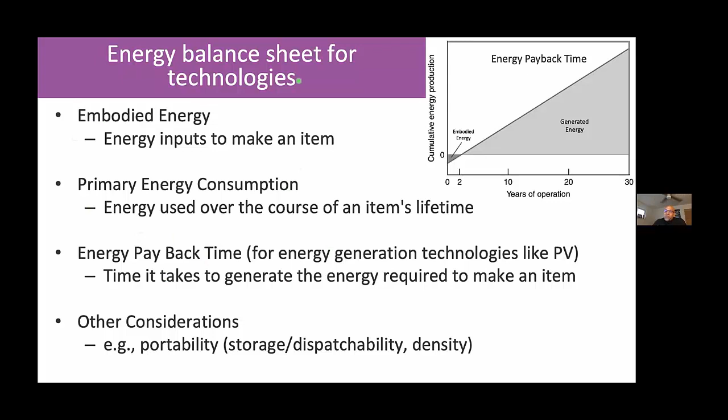That energy payback time is really kind of a critical break-even point. And then beyond that time frame, we have an energy return on investment from that particular technology. There are other considerations, like I mentioned in the context of a phone, portability, but for energy generation technologies, this idea of dispatchability, providing energy when we want it, where we want it, and also energy density. Things like fuels have high energy densities, and those have a value proposition all of their own that is part of the calculus that we want to do when we're thinking about energy technologies.

But if we look at solar technologies generally, there are a number of different solar technologies. These are the 3 primary ones that we typically think about at the National Renewable Energy Lab: solar fuels, concentrated solar power, and photovoltaics. Now, of these 3, 2 of them are really things that are deployed, and solar fuels is what we have here.

The idea of solar fuels is really an elegant one, which is the notion of taking direct sunlight and converting it into chemical energy in bonds, essentially. Either creating chemical bonds that we can use as a fuel, or driving directly the chemistry in a system like I've shown here, a fuel cell type configuration, and then getting the electricity from that.

So electrolysis is a great option for generating and releasing those kinds of chemical bonds. But we are trying to do, as you can see here with all the circles and all the little arrows, 5 or 6 really hard things simultaneously. In contrast with PV, we're trying to simplify that and make things a little bit more streamlined. But this does have the ability to generate things like fuels, which have some advantages in particular contexts with, say, dispatchability.

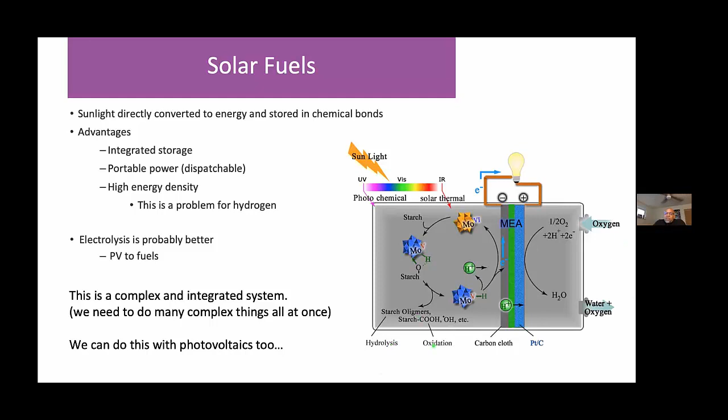If we look at, is it going to advance? Solar thermal, okay, concentrated solar power is something that we've known about for a while. It does have integrated storage. You have all these mirrors, you have what they call a heliostat or a receiver where you focus all the light, make something very, very hot, and then you use that thermal energy and convert it to electrical energy with a generator, essentially a steam turbine.

One of the advantages here is that you can do things like combined cycle, which improves efficiency, but you can also use dual fuel. So you can use a solar array during the day, and you could cross this over to, say, natural gas or some other fuel source to do the heating when you need it, or when the solar resource isn't as available. The catch has been that these installations really do require really good unobstructed sunlight. That is to say, things like clouds really impact the ability of these facilities to be very efficient.

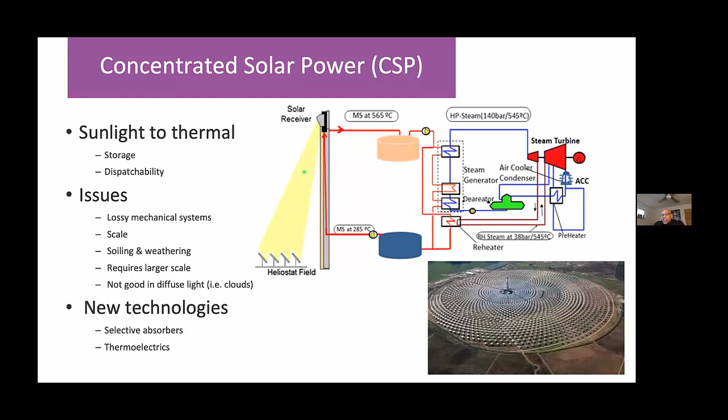There are also considerations of soiling, and the question of how large you need to be. Scale actually shows up here. You need to be big enough, but being too big creates its own set of issues for you as well. There are new technologies that people are looking at there, but the economics of these kinds of systems end up being pretty challenging for the most part.

Then we come to what we're going to focus on today, which are photovoltaic cells. So the idea here is a direct conversion of a photon from the sun into essentially an electron and hole. So it's kind of the inverse of what we do when we do an LED. In a light emitting diode, you combine an electron and a hole and you generate a photon. Here we're going to take a photon, create an electron and a hole, and those two things basically represent electricity that we can harvest directly.

I'm not going to make the mistake of, and I'm sure that most of the folks in the audience would certainly recognize the notion, right? People say, oh, well, the sun only shines during the day. Well, the sun is always shining. Whether or not you have access to it is maybe a separate matter. But if you're a ground mount PV or say a rooftop installation, certainly you only have access to the sun when the earth is essentially facing it. But that does create some challenges with dispatchability.

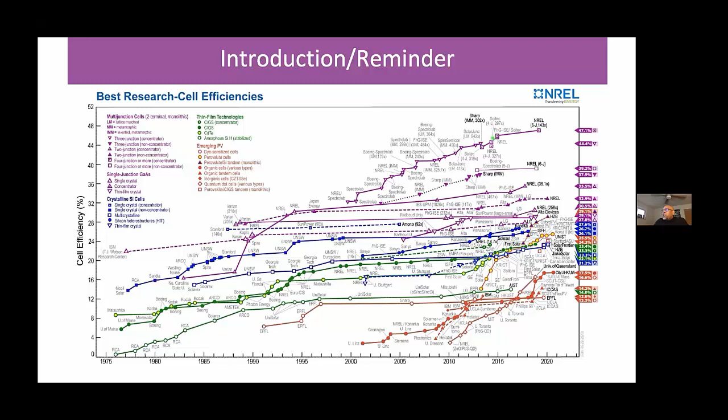But if you look at that, there are solar cells that started around shortly after 1975, and you can see that this chart goes up to, actually it looks like I've got a little bit of an older chart, but yeah, 2020. And there's a lot of different technologies, and some are way, way more efficient than others, as you can see. But you'll notice there's a little bit of a confluence around here, and we'll talk a little bit about why that is, and how it is you get into, say, this rarefied air up here of very, very high efficiency systems. But I wanted to make sure that we're all kind of on the same page with respect to the fundamental properties of a semiconductor.

If you take an atom by itself, it's got a discrete set of energy levels that are dictated by the details of that atom, right? Of its electrons, its nuclei, and so on. One easy example is something like neon, right? Neon gas has kind of discrete states, and it emits from the fact that basically you can excite an electron from the ground state to this upper state, and when it relaxes back down, it'll emit a photon, and that's how we generate light with, say, a neon light.

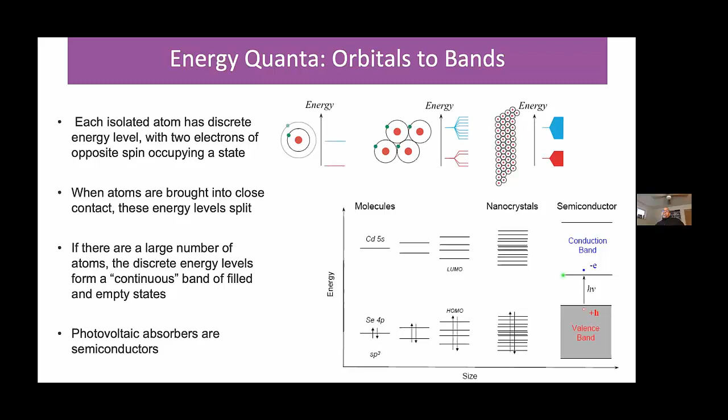All right, so this is the device physics of a solar cell. We have semiconductors where we can manipulate this electronic gap in the material in a way that we can tune it so that we can decide which photons we'll absorb. If a photon has an energy that's insufficient to basically take an electron out of the valence band to the conduction band, that means that the semiconductor is functionally transparent to those photon energies. And that's a really important kind of thing.

We very quickly thermalize the electron down, and that's again heat that's lost that we can't use as efficiently as we might if we just basically tuned the photon energy to the band energy here. All right. So that's Semiconductor 101. That's how all of these technologies here work.

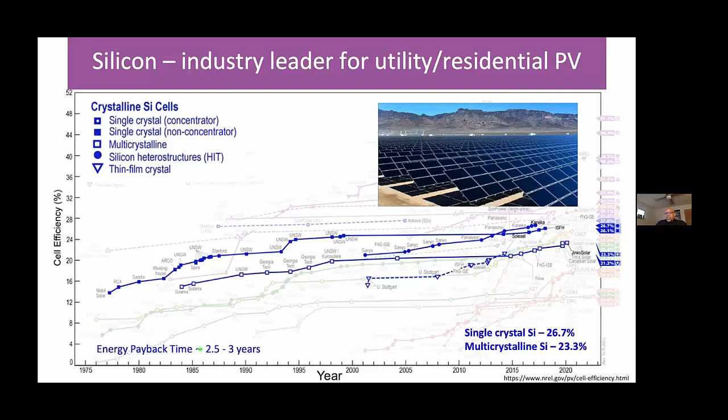Now, we have other materials like gallium arsenide, and these are really the best solar cell materials. They're much more efficient, right? From 26 to 30%, so 4 absolute percent more efficient than silicon. But if you look at the energy payback time, they're 4.5 to 5 years. And that's because the energy that it takes us to do all the refining of the materials and everything else is just a lot higher. And so it turns out, we'll talk a little bit more about this later, these materials are used, but they're used on things like the Mars rover.

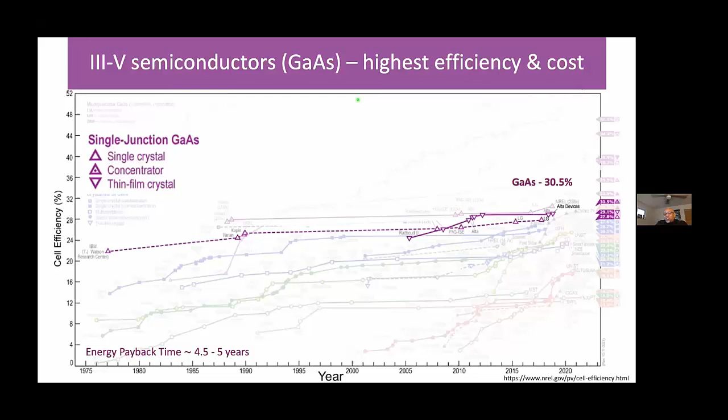The other commercial technology that we have at kind of gigawatt scale is CdTe, cadmium telluride. And First Solar, which is a US-based company, their headquarters, I believe, is in Toledo, or just outside Toledo, Ohio. This is a 22% technology, so not as efficient as, say, polycrystalline silicon or certainly single crystal silicon, but the energy payback time is a fraction of a year, right? So 0.8 to 0.9 years.

So it's much, much better from the perspective of the energy cost that it takes me to manufacture it relative to, say, a silicon module. And this is one of the reasons that while its efficiency is slightly lower, its cost is better. In addition, there are some other considerations as well, but this energy payback time is a real critical consideration.

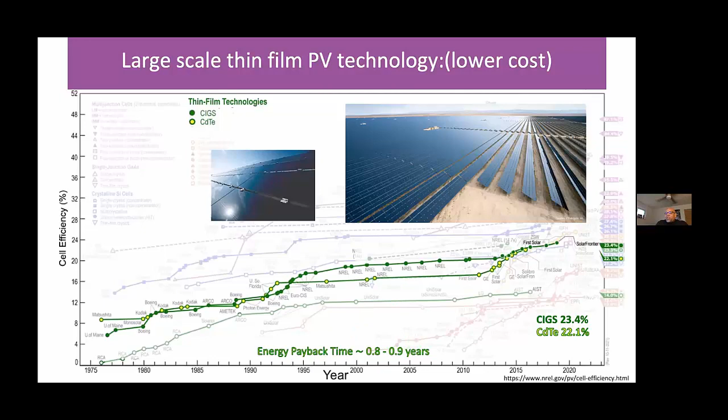So for the technologies that I work on most of my time, we're looking to basically change from that 0.8 to 0.9 years to 0.1 to 0.3 years for energy payback time with new technologies, namely these metal halide perovskites. And you can see here, I've included a number of other technologies that haven't succeeded because they really haven't achieved efficiencies that are sufficient to be commercially viable.

This is the efficiency chart for the record efficiencies for modules, which are what we put on people's roofs, i.e. combinations of cells that we construct one way or the other. Record silicon module at large scale, and the yellow or orange color here indicates the size of the module. A silicon champion module is at 22.8%, it's almost 23. CdTe, it's 19. And gallium arsenide is 25, so it's significantly higher, but again, at much, much greater cost.

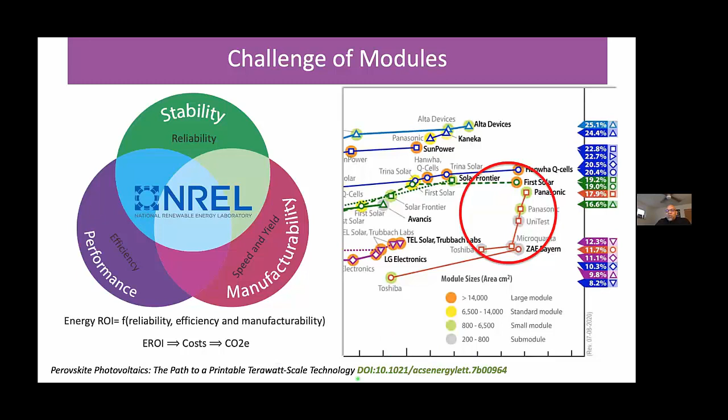And we have this article that's, I'm pretty sure it's open source, and you can find it where we walk through some of this stuff. But for some perspective, the first practical solar cells were reported in 1954. And this was going to be the thing that solved all of our problems, and with any luck still is. But the way that they evaluated the efficiency that I've shown you in these last couple graphs would not be okay to report today.

More importantly, when we think about efficiency, we test efficiency in what we call standard test conditions. We do it in a lab in a way that's very controlled under a very fixed set of conditions, but that's not how solar cells really operate in the real world. In the real world, they're outside and there's variable cloud cover, there's changes in temperature which impact the performance of the solar cell, and indeed the spectra can vary from different locations on the globe as well.

And when you account for all that variability, we have a figure of merit we call energy yield, which is taken from actual modules actually fielded to know what the yield of energy production is. It's got to be related to that efficiency, but it can vary pretty dramatically from just that raw efficiency number because of the details of the cell's ability to harvest energy, say, through the course of the day.

That efficiency is kind of the number that you get at peak sun, high noon in the middle of the day. But if, say, a technology like CdTe does better in the beginning of the day, at low light, in a way that silicon doesn't, and in fact, that's a thing, that can impact the energy yield. So when we talk about the energy payback time, we really are comparing that efficiency number or that idealized kind of energy yield to what it is that we've spent in terms of making that device.

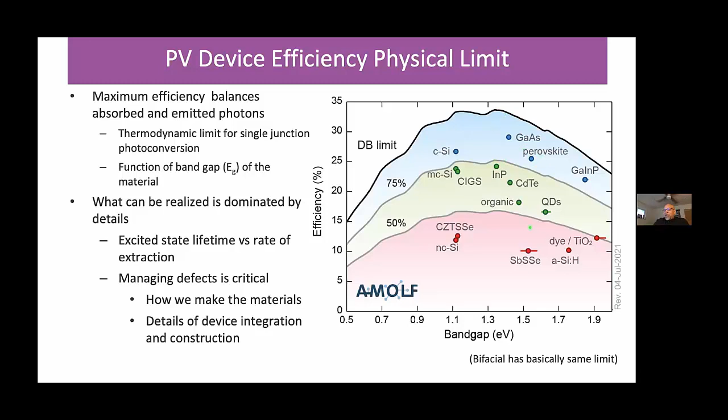So how do we beat this limit? Well, if you think about where our fundamental losses are coming from, they're coming from this compromise of, do we take the photon in or do we let it go through? And if we take the photon by lowering the band gap, how much do we create in terms of thermalization loss? If I had a single color for the light from the sun, I could make an 85% solar cell pretty easily if I matched it to the color that the sun was emitting if it was just one wavelength. So it really is the spectral content that creates this limitation.

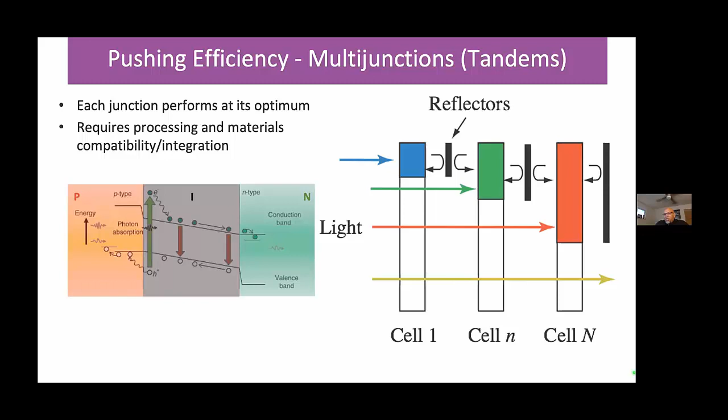So if I can slice the solar spectrum up into chunks by using multiple cells that each take a different slice, right? I can take these high energy blue photons, which would have created a lot of thermalization loss in this lower gap cell. I can take those off the top. They don't create that thermalization loss. The ones that aren't energetic enough go through to that second cell and to the third cell and to the fourth cell. And it's this strategy that allows us to get up into these extreme areas of the efficiency chart.

But as the graphics here indicate, these really are the best solar, and this kind of shows you a triple junction device like what I showed before, and how the solar spectrum is actually sliced apart by the different subcells. So this is the kind of thing that's often implemented. And again, it's one of the best technologies on the planet. Turns out, per square meter, it's kind of the cost of a Maserati. But if you're going to have a rover on Mars, it's totally a viable technology.

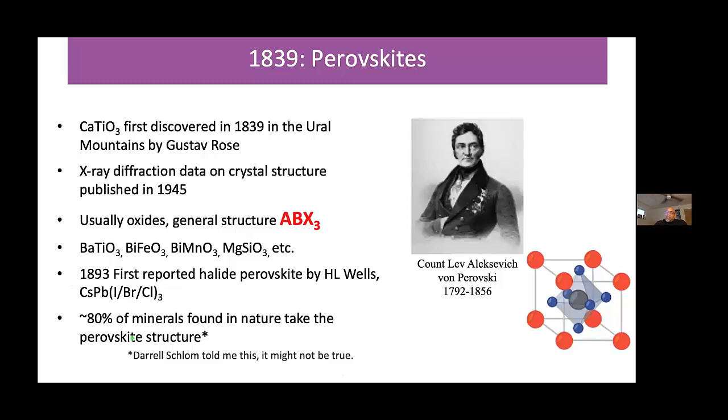So now I want to switch gears slightly to talk a little bit about perovskites. Perovskites are a really, really common structural motif for minerals that are common in the Earth's crust. Different oxides, barium titanate, bismuth iron oxide, all these kind of things. And something on the order of 80% of the minerals found naturally are perovskites. So those are not relevant for solar. But they have the same structural form that I've shown down here of the materials that are.

The materials that are relevant for solar are what we call the metal halide perovskites. And again, they have the same kind of crystallographic structure, the way the atoms are assembled, and the same chemical formula. But one of the things that's unique about these is that these materials are synthetic in the sense that they don't exist in nature. And one of the things that distinguishes them is that they have the metal, and here I've shown lead, but there are a couple choices we can make for the metal center. But they have these gray things that can actually be molecules rather than atoms, although we can use things like cesium at these gray sites as well. But they are a combination of organic and inorganic for the most part.

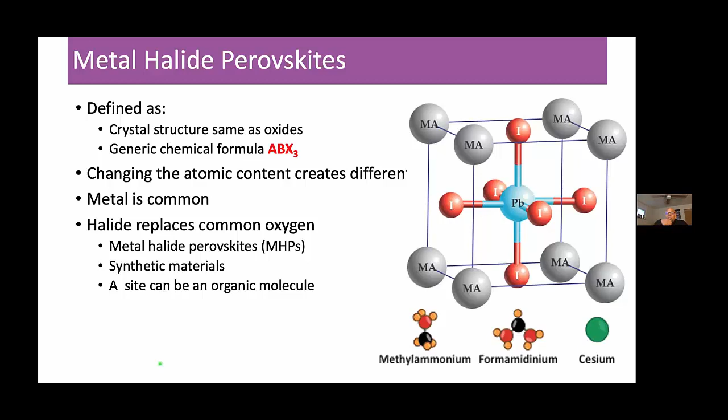Now, these materials have been around for a while, and they were first found by David Mitzi, and he was interested in them for transistors. But then more recently, a little over a decade ago now, people realized they were really, really interesting for the solar task. That is to say, they were semiconductors, because we knew about them from David Mitzi for things like transistors, but they weren't sufficiently better than the incumbent technologies, namely amorphous silicon in that case, for transistor applications. But for solar applications, they're way, way better than a lot of the other materials that we've looked at.

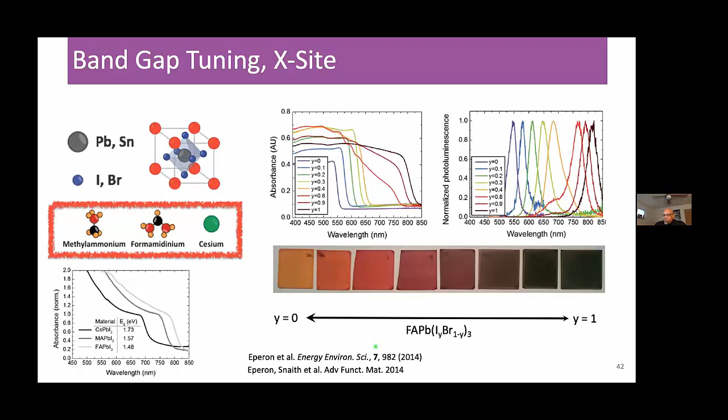So they absorb light really, really well. We can also tune their optical absorption, or that electronic gap that we talked about earlier. And these graphs just show that. You can see films where, as we change out the red dot here with different options out of this red box, we can tune essentially the color of these materials, and that again corresponds to the optical band gap. So they have a large degree of tunability, they interact well with light, and they do a lot of the other very basic things at a semiconductor level that we need to do to absorb photons, create electrons and holes, and extract them out effectively.

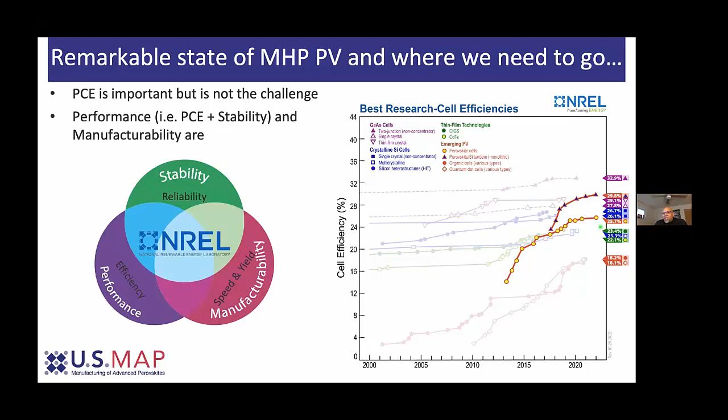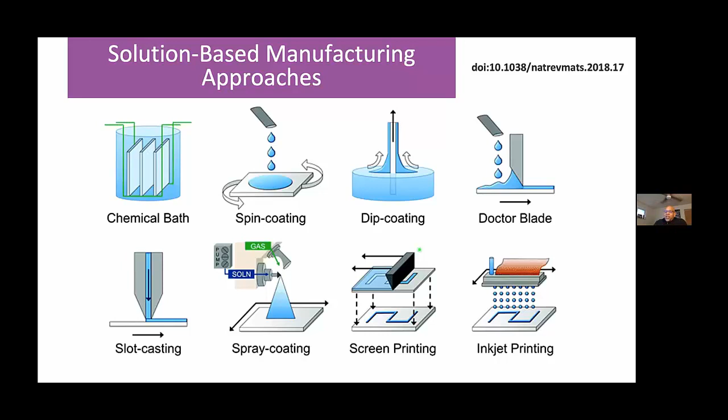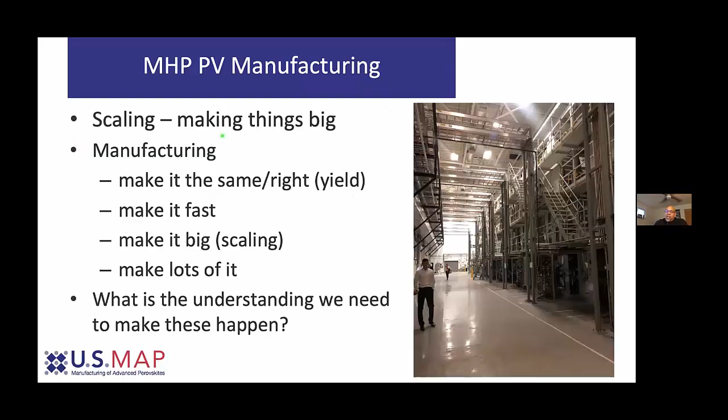And when you think about what that means, because we have essentially a material that has low embodied energy, we can tune the details of the band structure. We can make all these different tandems in a way that is kind of potential. Well, we think it's transformational.

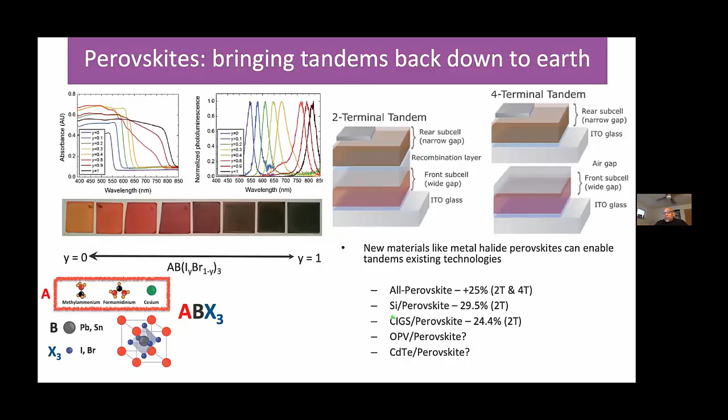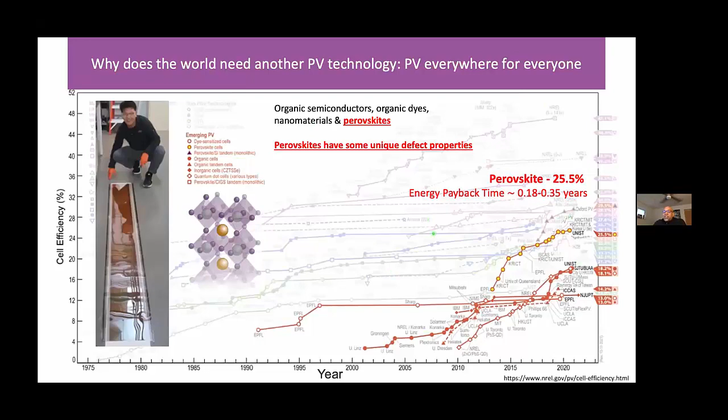CdTe with perovskite is one that people are kind of looking at, but maybe doesn't make as much sense as some of these. But we can really make all of these things happen, which means we now have access to higher efficiencies than we ever had before. And all with this notion of low embodied energy and really rapid energy payback time, and the idea that we're going to be targeting these kind of places in the chart at the module level.

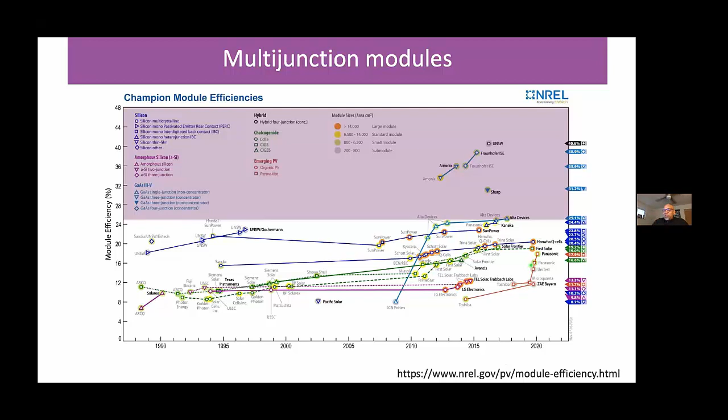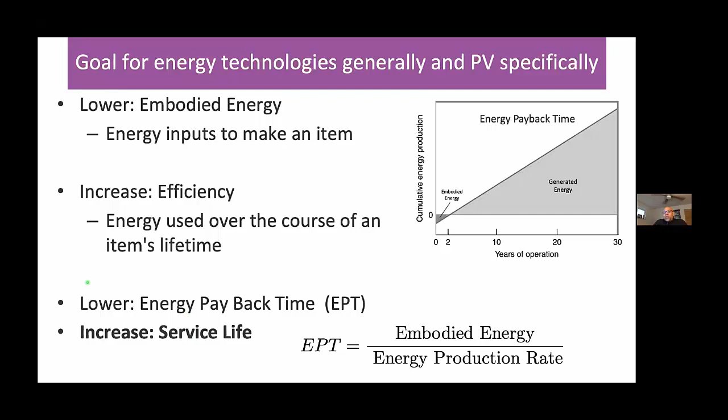So the last thing I want to talk about, given the hockey stick that I showed you in terms of this climb here: the scalability seems to be there with the materials at a very basic level. So that leaves me with this question of the years of operation, or the reliability, because this is an important thing in the context of this energy payback time and the EROI.

The challenge is that I can fundamentally walk into the lab tomorrow and tell you the efficiency in 5 minutes. Telling you whether or not that particular device is going to be scalable, okay, maybe that takes a couple weeks or maybe a month. But to ask the question, for a device I make today, where will it be in 30 years, is a much harder question.

And in the context of reliability, one of my colleagues used to say, if you heat an egg a little bit in the incubator, you get one thing, but if you heat it in boiling water, you get a very different thing. And so the notion of doing stress tests or accelerated testing on PV technologies sounds really good, but it's a really massive challenge.

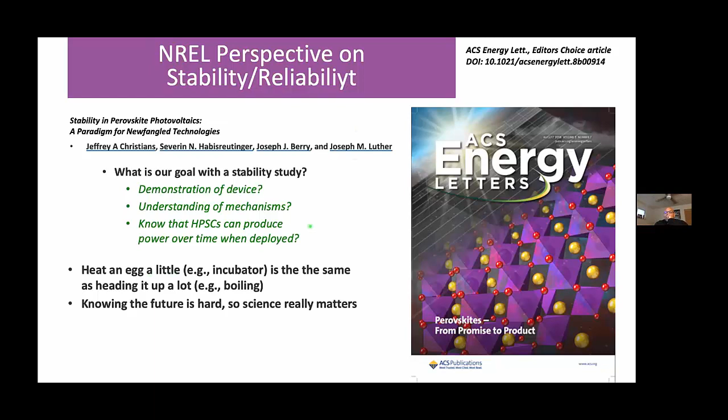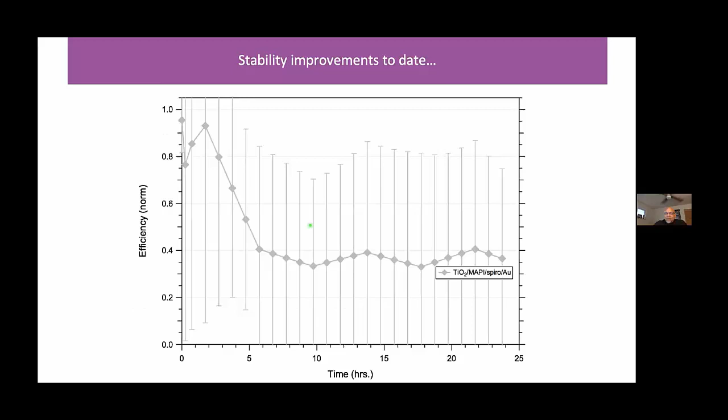And that's a lot of what we're doing these days: to understand how some of the manufacturing that I talked about couples to what the reliability really is, and how we find out very quickly what the reliability is. So the very last thing I'll leave you with is the stability of a solar cell that we made in the very first year of the project. My project's now been going about 6.5, 7 years. But this is all work that was done within the first year.

So we made a device that was a little bit more stable. I mean, this was a pretty hot mess. Then we made some more modifications, and we improved the stability a little bit more, and yet a little bit more, and yet more. And if you look at the difference between here and here, that represents about a factor of 100 change in the stability. And we did that in about 2.5 years.

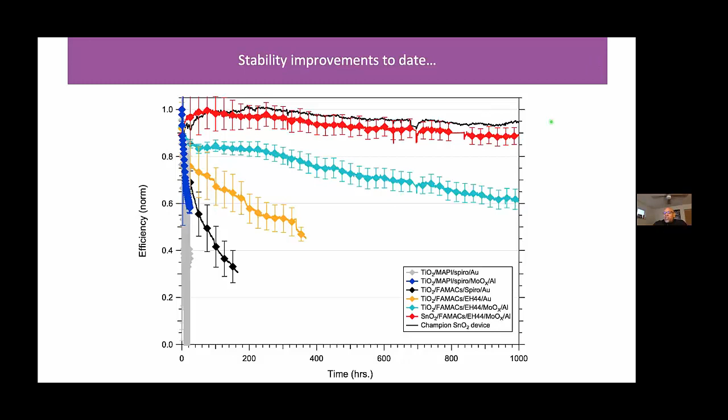And I thought we would still be working on this stuff, but these days we're very much concerned not with what's happening indoors, but what's happening outdoors with these devices. With what we see in the lab, I have to wait entirely too long to know whether or not I have any kind of defects that are going to cause a problem for long-term stability. And so we're doing more and more outdoor testing.

And then, perovskites are a technology that a lot of people say aren't ready for prime time, but there are already demonstrations out in the world of stable perovskite solar cells over extended periods of time in outdoor operation, at efficiencies that are less than what our team would aspire to, but are reasonably efficient nonetheless.

And then finally, turning back to where we are with PV technologies more generally, PV really is at a tipping point where we're in a position to start generating electricity with these clean technologies at a scale and size that really moves from a consumption to a sustainable model.

And that means that we need to be thinking about things like end of life and other things for PV technologies like silicon, but also for emerging technologies in addition to those incumbents, like perovskites. And indeed, we've already done a lot of work for things like end of life for perovskite solar cells, and are increasingly doing more and more on some of the incumbent technologies as well, as they have a little bit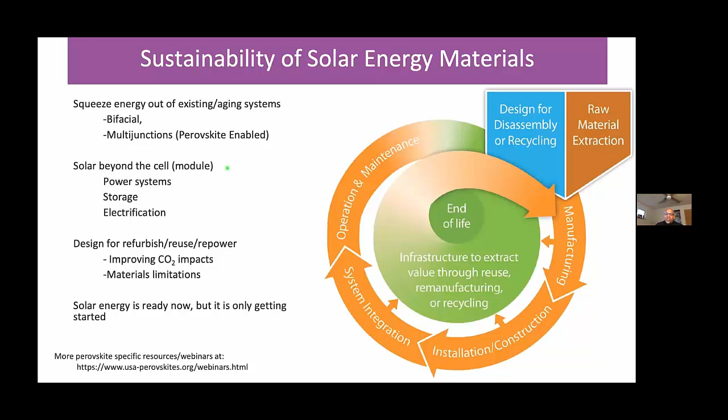more challenge. We've been designing from the get-go for the notion of achieving, say, terawatt scale technologies, which means we have to think about these things at the beginning in a way that silicon hasn't had to do, but is clearly what they aspire to do. So they're catching up very, very rapidly, since there's a lot of really high quality work in that technology as well. So I think that's all I got.

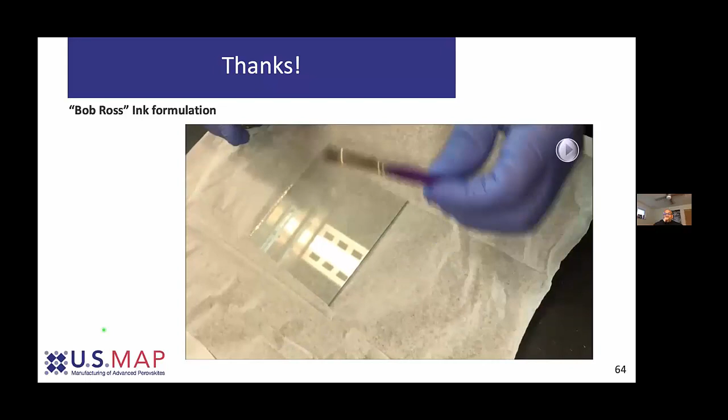I do have a little video that we'll let run. But this shows the magic of perovskites. Methylammonium iodide and PbI2 in my magic solvent chemistry I've been working on. Now we're going to see if we can emulate Bob Ross.

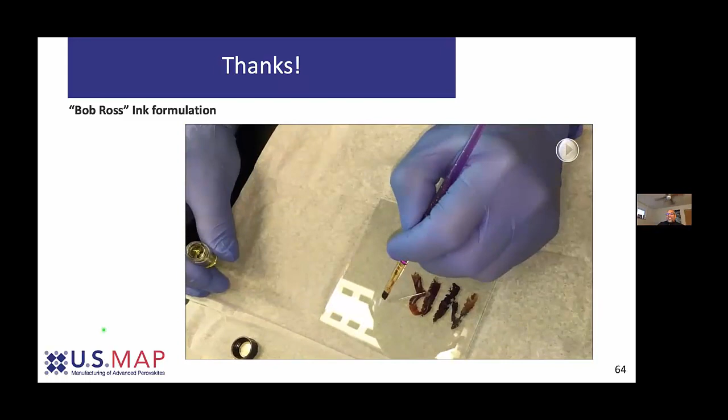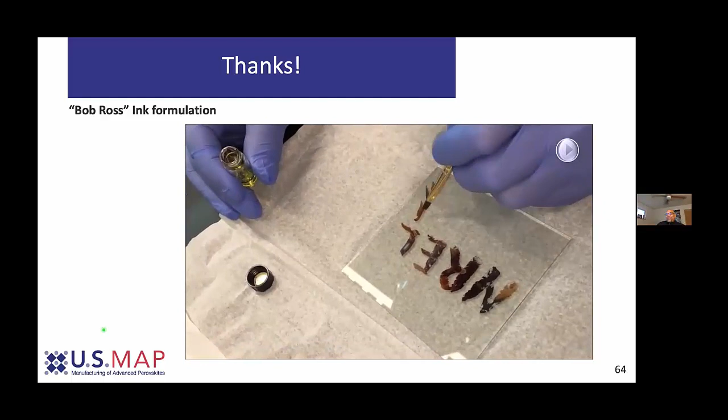So I'll just take a little tree. Say that I work at NREL. And then for Bob Ross, we'll put a couple happy trees in here. Maybe a little sun. A little mountain shrub. Let's see, a little mountain. Sun. So I think that makes the point.

And that's a few years old now. You can find it on YouTube, but that ink will support kind of an 18% efficient device. It's one of the older ones. We've moved on from that, it turns out, but it still demonstrates kind of the promise. So I'll take any questions if that makes sense.

Thank you so much, Joe. Chuck, are you and Joe ready? I can try and find the... I don't see the chat, but yeah. Just give me a minute. Okay. Sure, I can take the first one.

Go ahead, Joe. What, in your opinion, is the likelihood of adoption of the Build Back Better energy provisions in standalone legislation? That's outside my lane, I'm afraid. Yeah, I think we'll have to table that one. We could handle that at the end if somebody. I would love to know the answer to that myself, if I'm honest. I mean, I'm a serial optimist. Well, in some things I'm optimistic, in other things, right? As a scientist, you're paid to be pessimistic. My dad was a political science professor before he retired, so he's the person to ask on that one, I'm afraid.

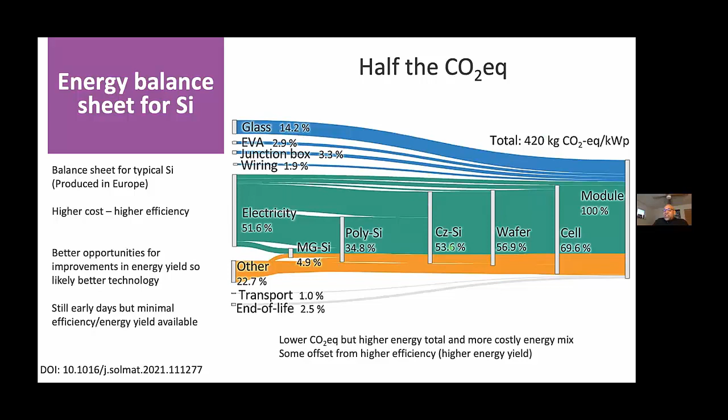So in other words, the price that you're going to have to pay for this module is significantly greater than the price you're going to pay for this one, because there's essentially no carbon tax, for example, as one way to normalize that. And that makes it very difficult to compete in the context of a U.S. market, because there are solar manufacturers in the U.S. like Hemlock and others, but if you're manufacturing silicon, there are a lot of other customers in the U.S.

For silicon, like Intel and AMD and Texas Instruments, those are the people you're going to sell your silicon to. You aren't going to sell it to people who are trying to make commodity products like solar. So that's a big challenge, right?

And there are a lot of reasons that are beyond the nuts and bolts of the science of what has to happen to make the materials, where from an economic perspective, there are some structural advantages that the central government of China has set up that give them an advantage in manufacturing and producing silicon that can be taken by people and made into modules at costs that are lower than what you could argue would reflect fair market value.

I believe that's something that's been investigated by Commerce and others. But that's probably about as much as I can say while staying in my lane. I hope that answers the question.

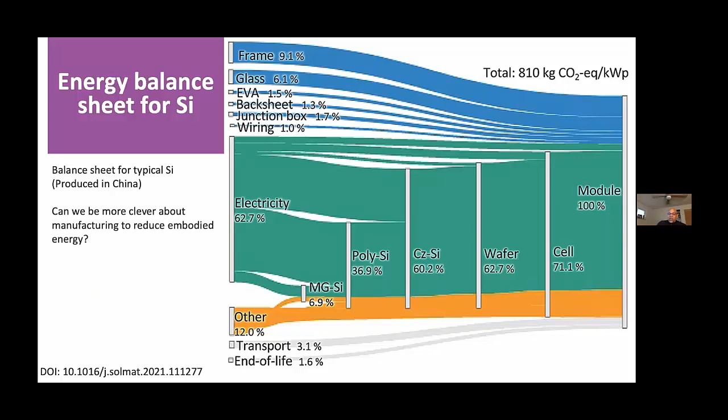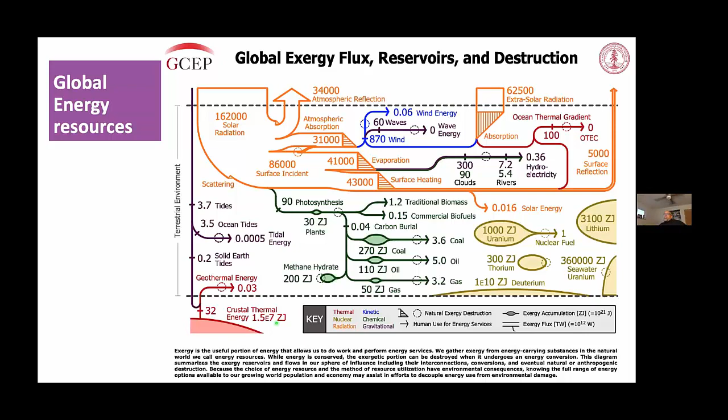Thank you. So you want to get the next one, Joe? Sure. For the outdoor testing, are you using full-sized modules using perovskites? So at the moment, we are still using what we would consider to be intermediate sized demonstrators. So we're doing things that are starting to become the size of a piece of paper, so to speak.

And that allows us to test a lot of the things that we're interested in, but it's clearly a necessary but insufficient exercise. And we're funded by the U.S. Department of Commerce, or pardon me, U.S. Department of Energy. Department of Commerce, where did that come from?

U.S. Department of Energy, the Solar Energy Technologies Office just did a piece in ACS Energy Letters where they outline their portfolio. And that office really does a lot of work to tailor their portfolio so that they're touching all the bases. But some of these activities are much more capital and resource intensive. And we're trying to get to the place where those kinds of investments can be made that really help U.S. industry in a way that's meaningful.

But we're doing intermediate size, not full-on modules like you would see from the likes of First Solar. And indeed, that's reflected directly in some of the graphs that I showed earlier. If I can find it quick, I'll throw it up.

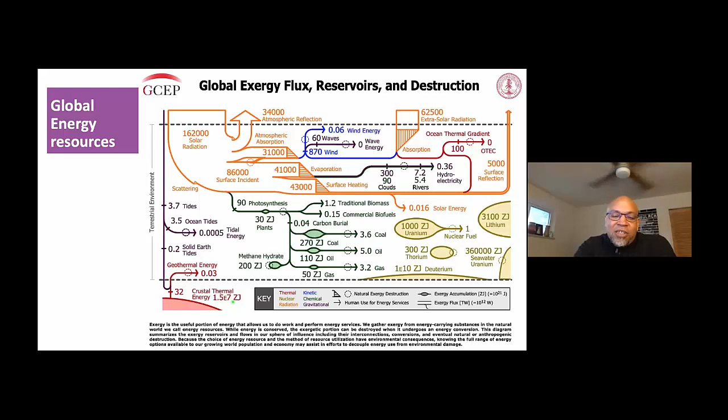Thank you. Okay, I got the next one, Joe.

When you speak about energy payback, are you considering only the energy payback of the PV device, or are you considering the energy payback of the complete operational solar PV system, which is the only thing that really counts? So I would argue with the only thing that really counts, but the balance of systems costs are something that we do account for in the way that we look at it.

And if you think about it, the paraphernalia that I'm going to use for a silicon module isn't different from the paraphernalia I'm going to use for a CdTe module or a gallium arsenide module or a perovskite module. So in that sense, the thing that we really care about is the efficiency of the device. The higher the efficiency of the device, the more you can offset those other costs, which we group into what we call balance of systems costs.

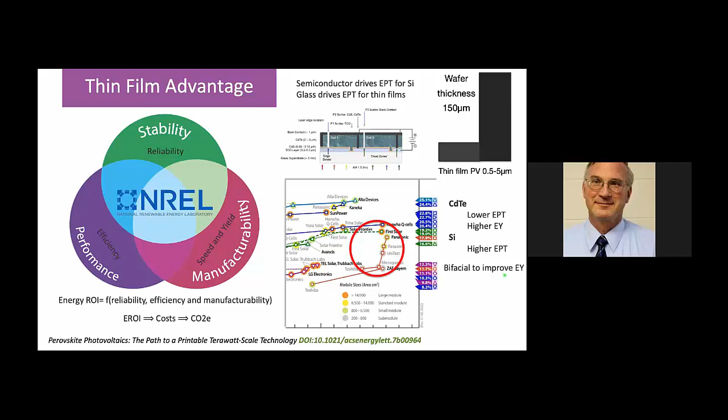Cadmium telluride. Cadmium is a heavy metal, right? You talk about recycling, reuse and repurposing. Can we do that with cadmium telluride? Yes. So cadmium telluride. Cadmium is a heavy metal, like lead, which is the basis of most of the metal halide perovskites that I've talked about here. Cadmium is much more toxic than lead, but it is bound up with tellurium, which means that it's not quite the same thing. Having said that, you don't want to eat either of them.

Tellurium, on the other hand, is a material that's not terribly abundant in the Earth's crust. But if you consider how much of that material I need in a thin film PV versus how much material I have just by pure mass in a silicon device, that material is both precious and relatively sparse in the overall module. So the embedded energy for CdTe, and any thin film technology, is really dominated by the energy that we use to make the glass for the front and back sheets. Wow.

Yeah. And it turns out that for CdTe, because cadmium and tellurium are materials whose supply chains are a little bit challenging for various reasons, First Solar recycles at really, really high efficiency. They recycle at north of 80% by mass. The glass gets downcycled, but the cadmium and tellurium, which are key components to their manufacturing, get recaptured for the most part. And similar could be done for perovskites, right? That's exactly right.

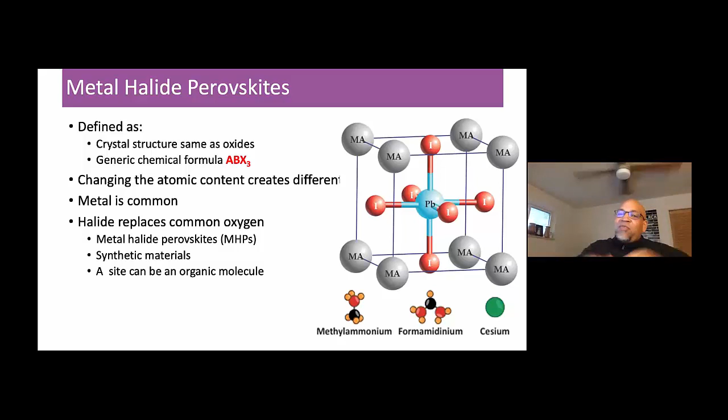But we don't want to create situations with a technology where we're not able to implement them in ways that are equitable and just, and where, say, communities that have financial challenges might be exploited. So there are easy solutions that we've been looking at and implementing to basically make sure that if one of these modules were to fail and, say, be cracked and rain were to come in, that we would grab up all the lead and it would still be contained in that module and it wouldn't be a spill hazard.

And this is work that we published in Nature a few years ago where we show that. And these technologies are low cost and cheap. And given how hard it is to find a semiconductor that can do what these materials can do when they have lead in them, in terms of absorbing photons and changing them into electricity, these kind of technologies are far and away the place where I think research effort is best spent, if that makes sense.

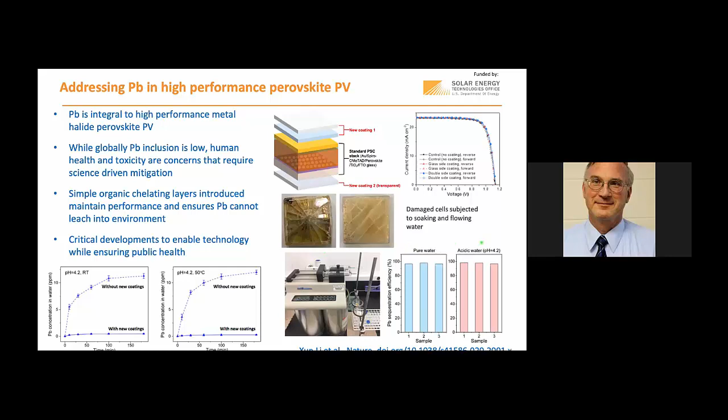Okay. We've got definitely some more questions, Joe. Are you up for a few more? Oh yeah, yep. All right.

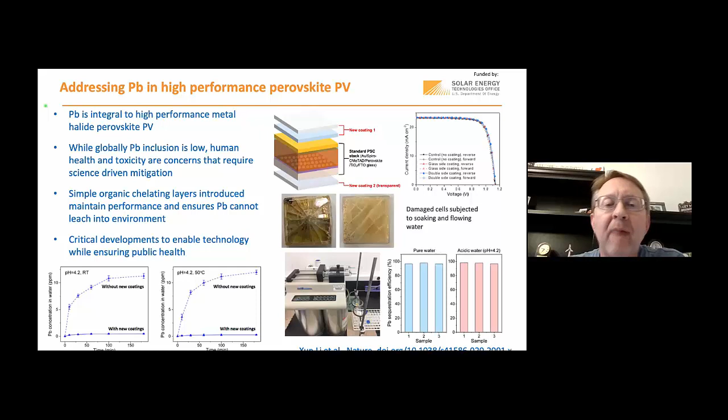Okay, have you seen or heard of hemp, HEMP, biomass being used for panels instead of silicon? So not in the absorber, right? For the primary absorber, you need a material that is really a semiconductor. You can't do it with a plant in the same way, right? So a photosynthetic kind of concept, there are ideas about using things like organics or bio-inspired materials to do that, but none of those are at the kind of efficiencies that make a difference.

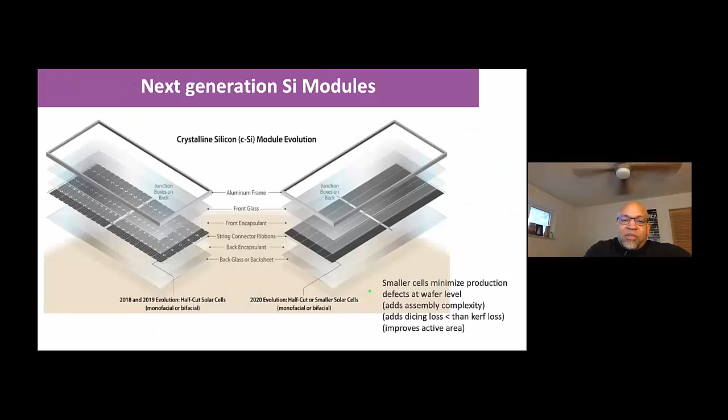The place where some things start to become interesting is really in some of the module components. Let me go back here quick. Where's my module picture? Yeah, so if you look at your module, this aluminum actually takes a lot of electrical energy to produce, right? And that's indeed reflected in this accounting, right? The frame is a pretty significant sink of energy and of carbon. So finding ways to do that with structural materials like hemp or biocomposites that would be hemp and, say, woody plant-based is something that some people are starting to look at.

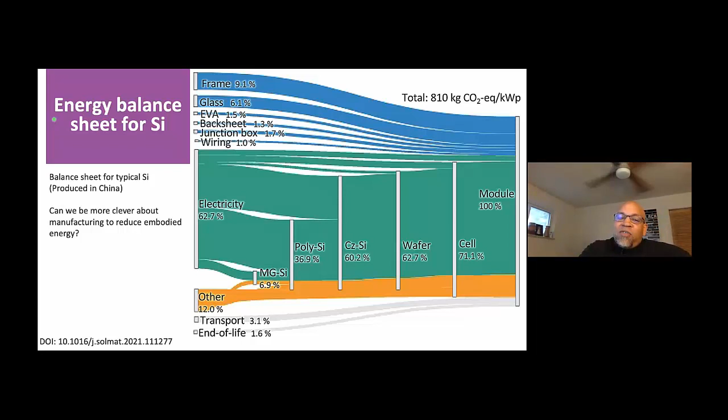As well as the other parts of it. So I've worried about the frame, but if I went back to this one, right, if you think about the stanchions and other components, again, there are opportunities there for those to be greener products than, say, something like aluminum. Although aluminum could be worse, the recyclability is super high on aluminum. So once you've spent that energy to make it the first time, reusing it is a pretty tractable thing.

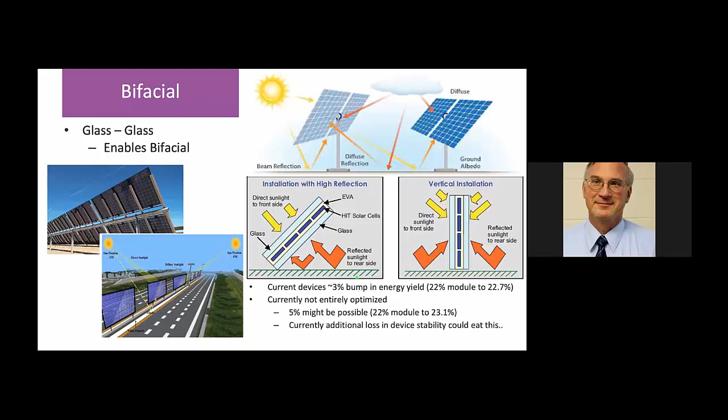Okay. So there's another question around, I think it's 3D configurations of panels. Instead of a flat glass sheet, incorporating the equivalent of lenses to focus the light. Yes. So yeah, there are some very interesting concepts that one can use to basically do that. All right. Let me try and address it this way.

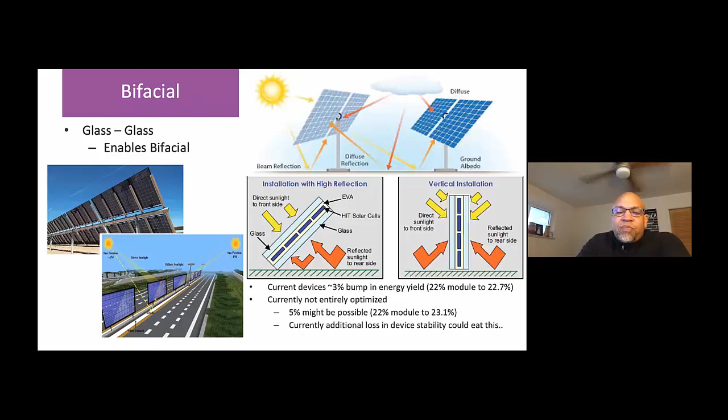In addition, you can also do approaches that are more on the quantum side, where you take a single photon of a particular wavelength and you make it into, say, two longer wavelength, lower energy photons that can still be absorbed by your absorber, but then you avoid the thermalization loss. That's what we call spectral splitting.

And typically those light splitting approaches, say like the prismatic ones that I described, have some optical losses that end up making it a little bit challenging. And the squeezing and splitting approaches have some losses that are more fundamental science challenges that people are working at, making some progress. There are some concepts that I think are coming close to market that could really improve.

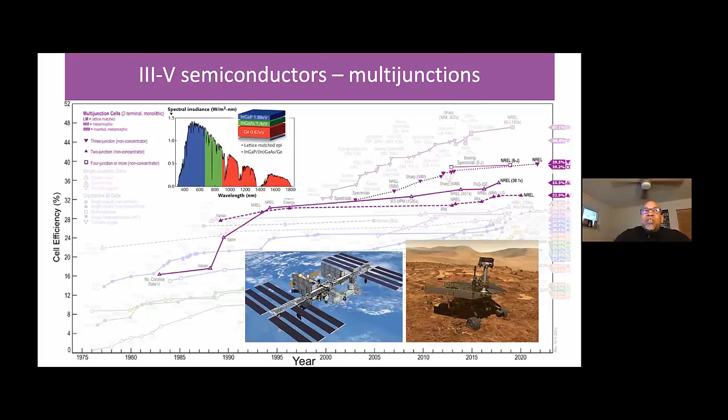It's what we call an optically coupled tandem type device, where your first layer really takes all the photons at the higher energies and converts them to lower energy photons at a higher number, and then you absorb it into your device. That's a strategy that people are playing with.

Yes. Okay. Can you hear me? Where is the development for quarter-thick silicon solar PV cells? A 1/4-inch thick? That's what it says. Oh, that's a... I actually said quarter thick. I thought I've seen some publication where they're going to cut wafers that are a quarter the current thickness.

Yeah, so this is a concept that people have tried a couple different times. The challenge has been not so much in doing it as doing it in a way that is highly manufacturable and scalable with high yield. So there were a number of companies that tried this a number of years ago, and it makes sense and it's rational, and it could basically lower your embodied energy costs significantly.

One of the things about silicon as a semiconductor, though, is that you do fundamentally still need much more of it than you'd need of a lot of these thin film materials because silicon doesn't interact that strongly with light. So those thinner technologies and the hassle of the wafer handling is accompanied by a loss of efficiency that hasn't made them terribly appealing. However, in the context of a tandem, like the silicon perovskite tandem that I showed, because the silicon doesn't need to absorb as many photons, that starts to become an appealing idea again.